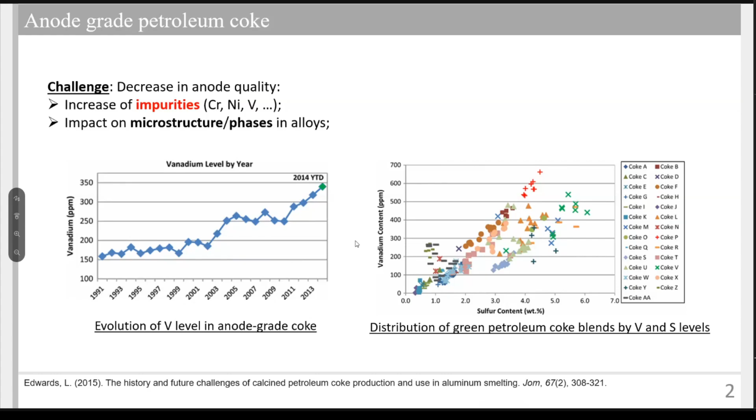And as well, the blends that are available for primary aluminum production have increasing contents of vanadium and other impurities. Such impurities are not harmless in the final product of aluminum alloys. In one study whose results I show here, you can see that in the stress-strain curves for a 2000 series alloy, the vanadium content has changed the mechanical properties.

And because of the demand for increasingly high performance alloys and the need for, for example, recycling, the content of impurities must be tightly controlled. This leads to my research question, which is: what is the impact of chromium, nickel, and vanadium impurities on the production of wrought aluminum alloys, especially regarding the solubility of impurities in beneficial phases, and the formation of new undesirable phases?

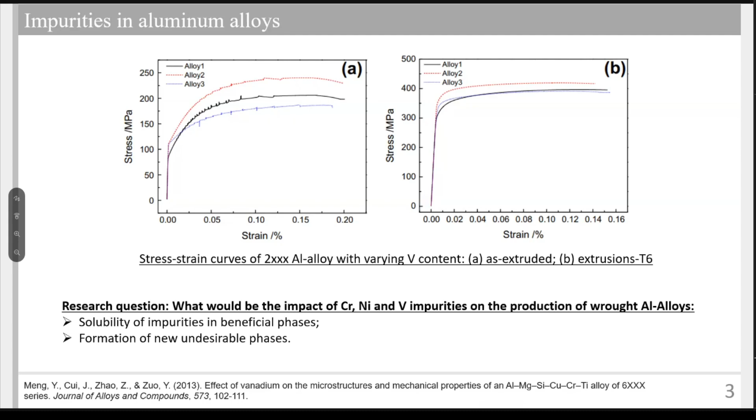So my primary objective for my master's project is to improve the existing thermodynamic databases to account for the select impurities, once again chromium, nickel, and vanadium, in select aluminum alloy series. Here we targeted the 2000, 5000, 6000, and 7000 series. These series are interesting because they are high performance alloys used in automotive and aircraft production. We have already identified some of the important phases that we want to look at, seen in this table here.

As applications of this whole project, we aim for improving alloy design and alloy elaboration, taking into account the impurities we mentioned. We want to help manage the impact of impurities on the critical phases, and perhaps most importantly in the current climate, the control of impurities in aluminum recycling.

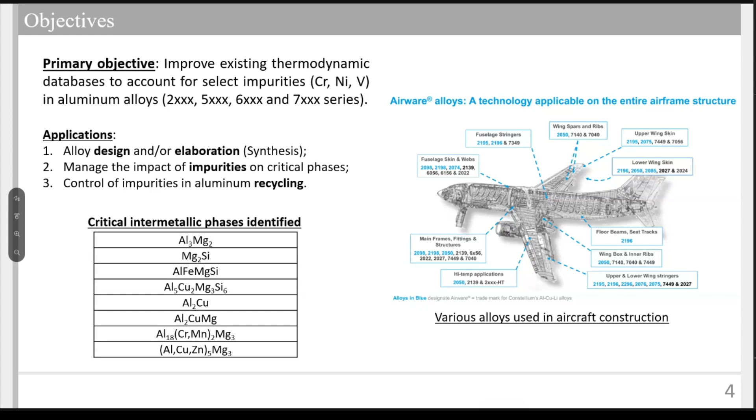Now, aluminum recycling poses its own challenges, most notably the low tolerance of impurities for wrought aluminum alloys compared to cast alloys. And such impurities are difficult to remove. If you look at the three we mentioned, they are much harder to remove compared to, say, magnesium and zinc. This difficulty and these challenges will affect the whole scrap collection and separation strategy and the whole aluminum cascade recycling plan.

Hold on, I have an annotation demand from Laura. I don't know if you can just... yes. So I'll be continuing.

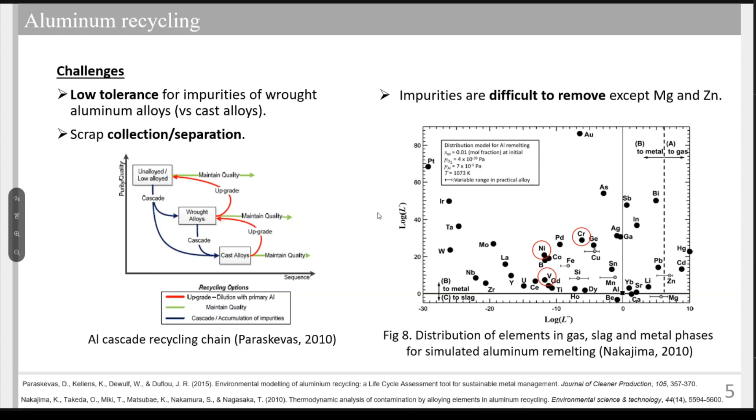So yes, aluminum recycling is also a key aspect of my project. For the strategy, I'll be using the CALPHAD approach. This is something that I'll also be giving a brief introduction to, along with an introduction to the FactSage solution module, this afternoon. So a bit of self-promotion here. To summarize the CALPHAD approach really quickly, we have to determine the systems and phases of interest. This afternoon, we'll be looking at one particular simple system, the aluminum-silicon phase diagram.

From there, we need to collect data from the literature. If such data is not available, we can make our own experiments. In our case at the CRCT, we could also use atomistic simulations, like we've seen before. After that, we need to choose appropriate thermodynamic models, and one that we developed here at the CRCT is the modified quasi-chemical model. After that, we can improve the existing database, with the goal to test and use the database to make phase diagram calculations and to explore the solubility of impurities in phases.

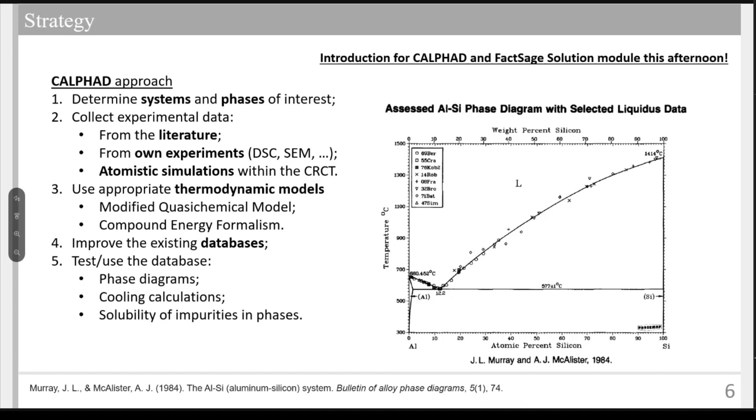So at the beginning of my project, I wanted to look at real alloys and see which phases are formed, using FactSage, and once again, this is another example we'll see this afternoon, the use of FactSage for cooling calculations. Also note that the calculations I've done here use an older version of the FT-Lite database, so results may vary.

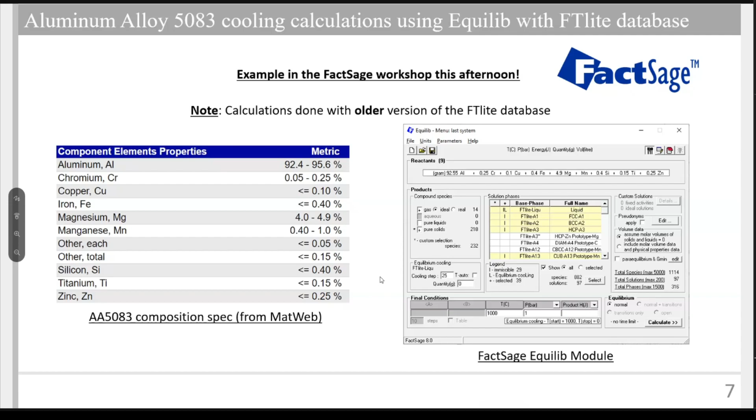But I started with the 5083 alloy. You can see the composition limits in the table on the left that I pulled from MatWeb. And using the FactSage Equilib module and selecting the appropriate phases, and I'll cover this in the afternoon, how to select the right phases to ensure that the simulation does not last too long.

Yes, so doing the cooling calculation, you will be given two options, either the equilibrium cooling or Scheil-Gulliver cooling. Equilibrium cooling, as the name implies, means that the cooling rate is low enough to allow at every point for the phases to interact with each other. On the other hand, the Scheil-Gulliver cooling happens at a fast cooling rate, which means that the phases once formed will not interact with the liquid anymore and will be permanently locked in.

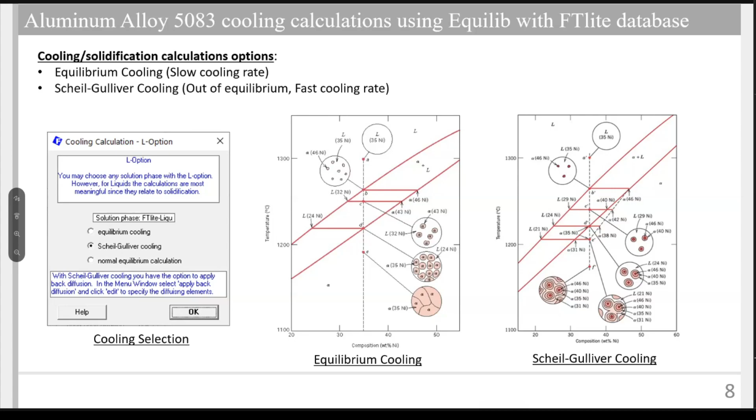So running the simulations, we arrive at the results, here representing the raw data results page. Already from looking at the two cooling simulations, we have some of the phases we previously identified that are present, which is a good sign that our databases are accurate. But also, we have some other phases that we didn't consider as critical. Looking at the invariant reactions happening during cooling,

we can see that the primary phase formed in this case is Al11Cr2, and the Al matrix only occurs later on. And an important thing we can see is the final disappearance of the liquid happens at two different temperatures depending on which mode you're using for the cooling. So here in equilibrium cooling, it happens at approximately 570 degrees Celsius. And for the non-equilibrium cooling, it happens around 430 degrees Celsius.

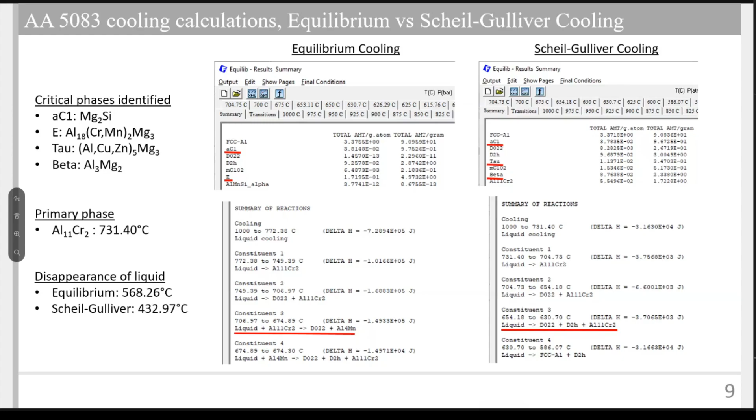So for example, for both cases, the Al11Cr2 phase is the first to precipitate. Because in equilibrium cooling the phases can interact with each other, the phase is not present at the end of solidification, but in the case of non-equilibrium cooling, because the phases cannot interact with the liquid once they're formed, the composition stays until the very end of solidification.

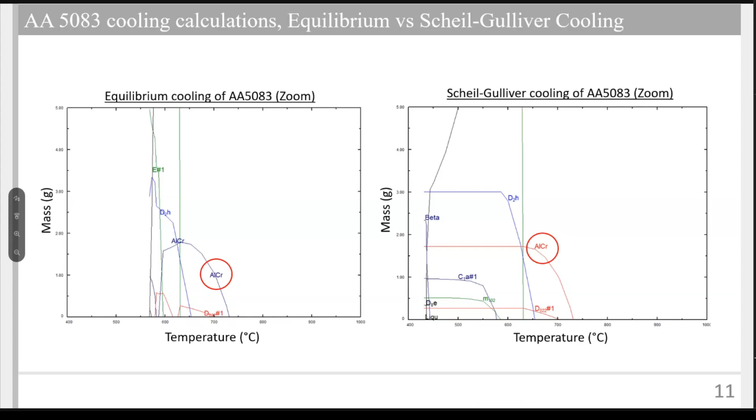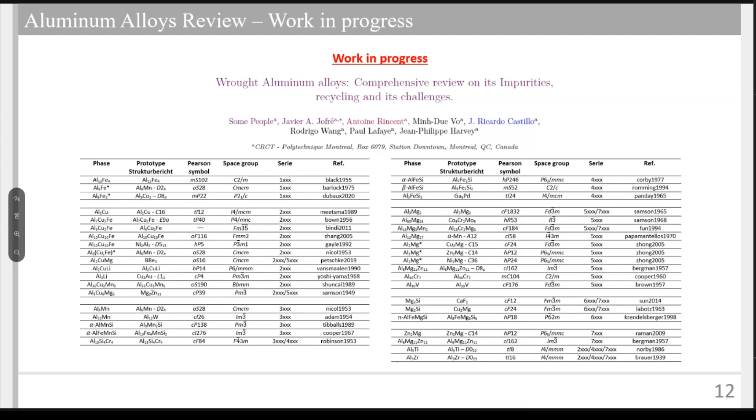To conclude, I want to just show a bit of my current work and what future work I have. So I cannot really overstate the importance of the literature review for the CALPHAD approach. So I need a lot of thermodynamic data from the literature. It's going to be the binary phase diagram data, the ternary phase diagram data, solubilities, activities, enthalpies, heat capacities, and especially ternary phase diagram data.

This is something that I'm working on right now, and there's still some gaps, as you can see in the table here, where I need to find more information. But once again, this shows the importance of the literature review, because if the data is not there, then we have to use experiments to try and fill in the gaps using EDS, WDS, SEM, and even DSC. And on top of that, I can also help with some heat treatments and mechanical tests in collaboration with our partners.